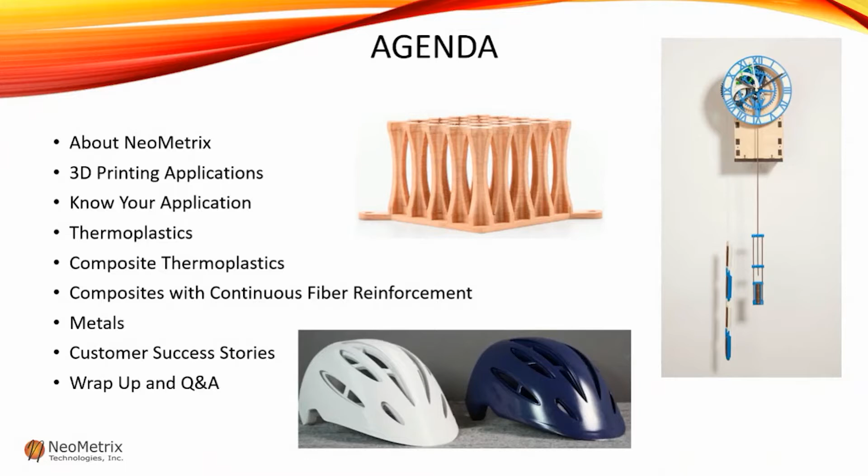So here's our agenda. I'd like to start by telling you a little bit about NeoMetrix. Then we'll review a variety of 3D printing applications, and we'll discuss things you should consider for your specific printing applications. Then we'll look at some various materials available, including thermoplastics, composite thermoplastics, composites with continuous reinforcement fibers, and also metals. Then I'll share some interesting success stories with you, and finally we'll wrap up with a brief summary of 3D printing solutions. It should take about 30 minutes. I hope that's good with everyone.

NeoMetrix has been delivering 3D engineering solutions since 2003. We provide scanning services for reverse engineering projects and also quality control inspections. We also have quite a few 3D printers in-house, so we're available to print parts for customers. We also sell equipment for 3D scanning and 3D printing solutions, as well as any related software packages. We provide complete training on all hardware and software solutions. Today's webinar will focus on 3D printing materials for BigRep, Intamsys, and Markforged.

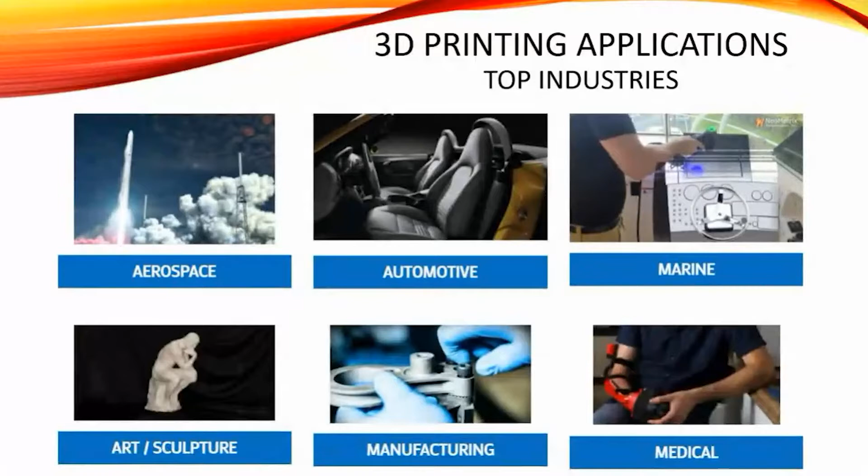And now back to our previously scheduled topic. 3D printing is used in many industries with a wide range of applications, all requiring different material properties. In the early days of 3D printing, the primary application was basic, simple prototypes. But today we have the ability to use more advanced materials, so the applications have also grown considerably.

Some examples are end-use parts. We have the strength and durability allowed for functional, complex parts at reduced costs. Tooling development - we can quickly print complex geometries that cannot or are not easily machined. Service or maintenance - we can create custom tooling or fixtures that will ultimately reduce downtime, which saves us money. And we have the ability to make functional prototypes for testing.

So now you have the ability to evaluate actual part properties. You can make design changes, quickly print new iterations. What this does is it takes the guesswork out of engineering. You don't have to rely on just the simple, basic prototypes anymore. What are some of your applications for your current 3D printing projects? Feel free to drop us a note in the chat or let us know what industry you're from.

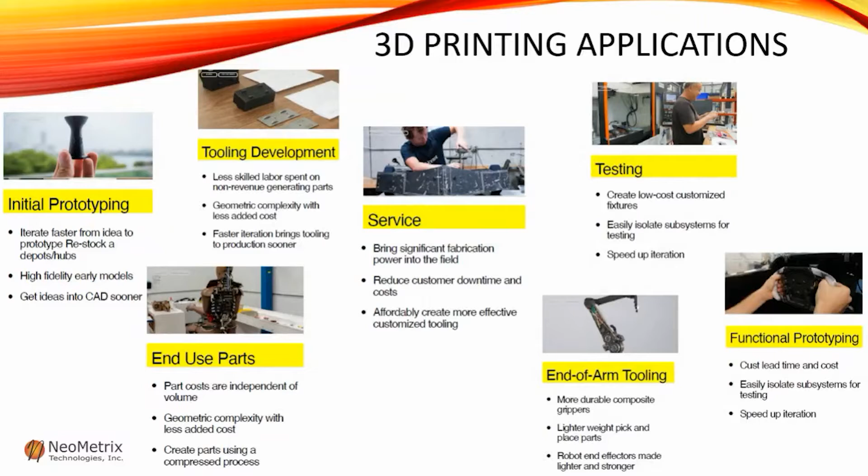There are many things to consider when trying to select a material for 3D printing. What is the primary function of the part? Is it a prototype? Will it be put to any tests? Is it going to be an end-use part that needs to be strong but also visually appealing? What are the specific requirements for the part? Does it need to withstand heat or flames? Is it a load-bearing part? Will it need to have any flex?

Perhaps you need to prioritize these requirements. Which ones are the must-haves? How high of a priority is cost? And I realize this opinion might vary, even between people working on the same project. But it's always worth considering.

How many parts do you intend on printing? Is this an annual number? Is there a cheaper alternative material that will still give you the expected quality? And finally, what about the color or finish of the part? Is this critical? If you find a material that meets all other criteria except for the color, perhaps it can be painted or dyed in a post-processing step.

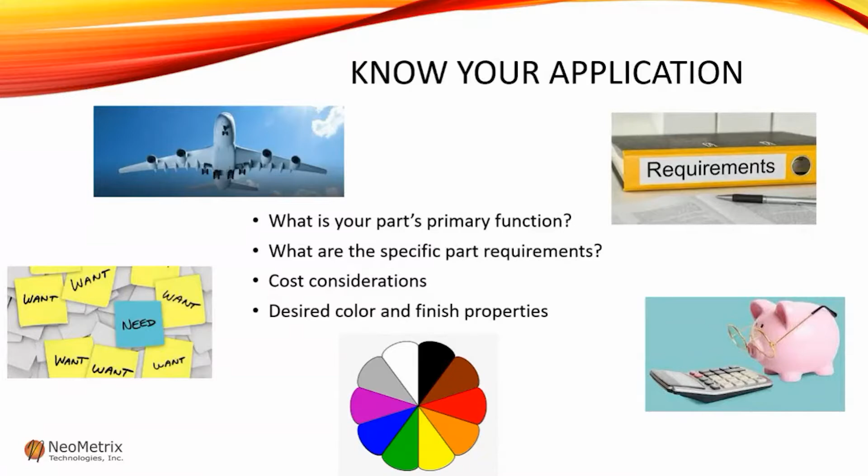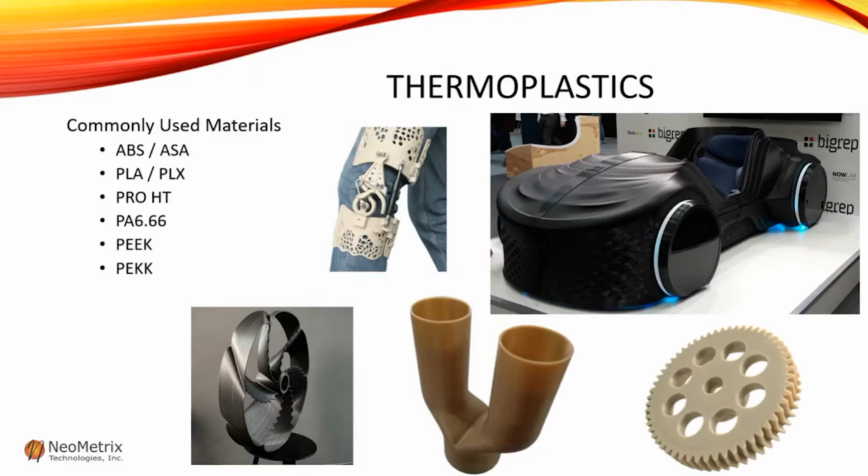ABS is one of the most commonly used and most versatile materials available in 3D printing today. It's really a great choice because it has structural integrity and detail. It's ideal for wear and tear parts.

ASA is actually similar to ABS with a couple of advantages. It's actually stronger and stiffer than ABS. It also has excellent weather resistance, UV, water, thermal resistance. ASA can actually withstand the really hot temperatures of sitting in parked cars in the southern heat. It's a very popular choice for vendors attending trade shows that have sample parts they want to display, but they might be subjected to a lot of time in a hot car.

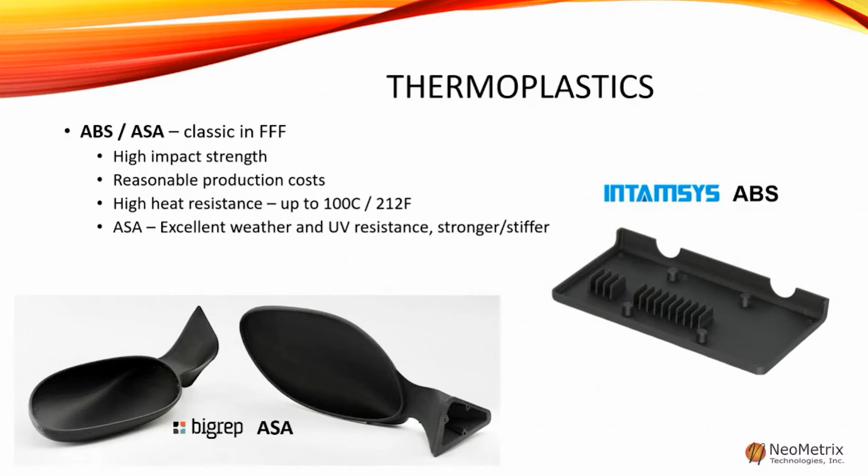PLA is also a very popular choice, and it's actually really easy to use. It's stronger and stiffer than ABS. It has great geometric stability. It keeps its shape when it cools. It's fully biodegradable, and that's great for the environment.

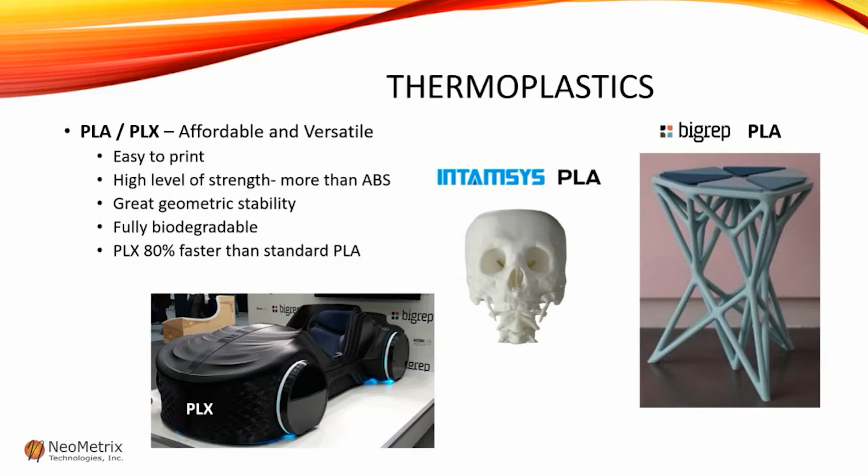PRO HT, this is actually very easy to print, and it's what we typically use here at NeoMetrix for our large printed parts. It's a PLA alternative. It has a higher temperature resistance, so it has minimal warping and shrinkage compared to a standard PLA. It also has similar characteristics to ABS, temperature resistance, tensile strength, and flex.

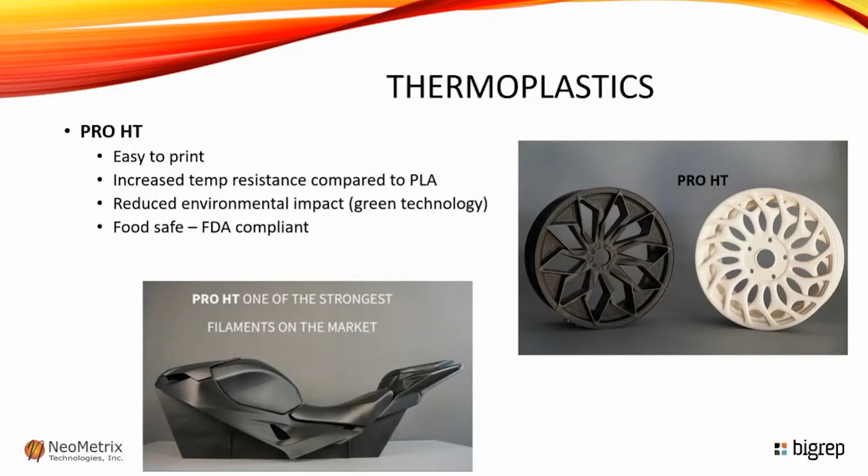It's fully biodegradable under the correct conditions, so it's definitely a green technology. And another advantage is it's completely food safe. It's approved by the FDA. The photo shows an example of a large printed part without any warping effects. You can also see it has a nice matte surface finish.

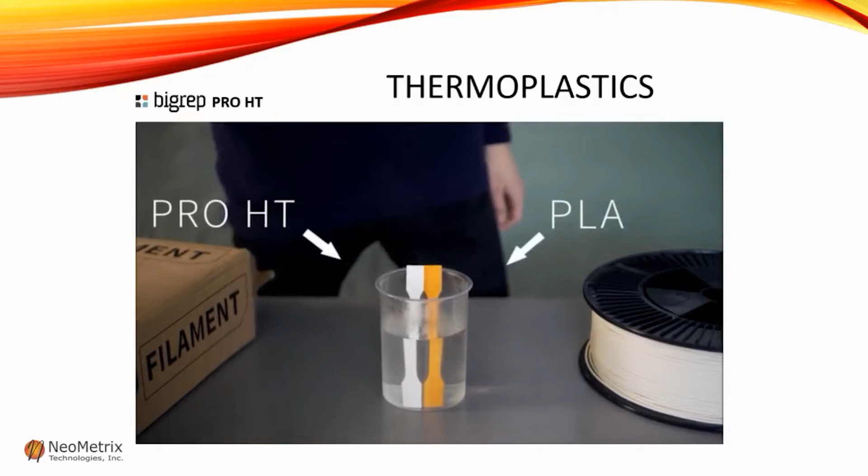Next, I'm going to share a video that demonstrates the heat resistance of Pro HT compared to a standard PLA. So they just poured boiling water, and you see Pro HT is on the left, and then the yellow strip is PLA. And so they're going to sit there, and you can actually see the PLA is already deforming. So the white one, the Pro HT held up really great in the boiling water.

Nylon has become a go-to in traditional manufacturing. So it's really not surprising it's also a popular choice for 3D printing. It's lightweight, flexible, durable. It's great for wear and tear parts like functional interlocking gears. But you do need to be careful when using this filament. You want to keep it very dry because it likes to absorb moisture. But this actually helps with post-processing steps like dyeing or painting.

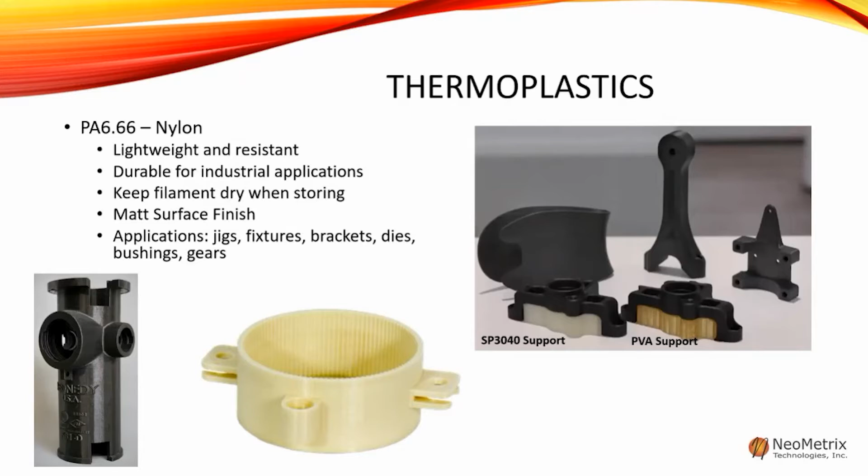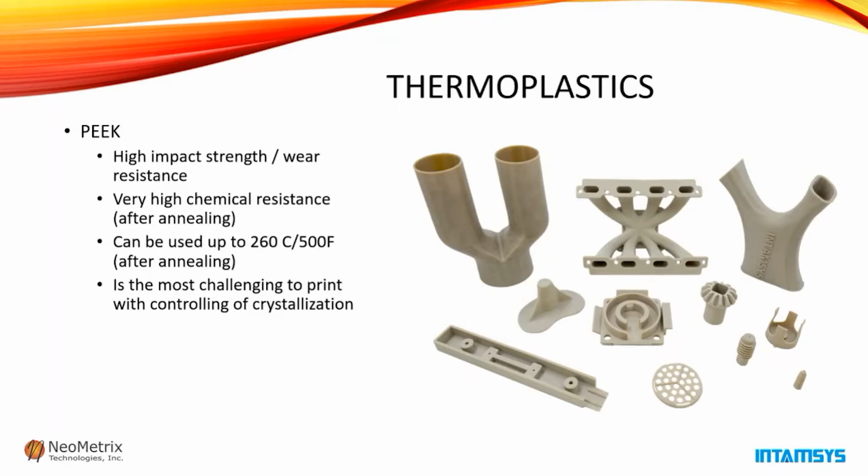Next, we're going to move on to PEEK, which is a great example of a high-performance thermoplastic. It has a very high strength and wear resistance. After annealing or heat treatment, it can be used in applications up to 500 degrees Fahrenheit. This makes it ideal for many industries requiring flame-resistant material, such as aerospace. It is a challenging material to print, though, because it requires very high heat for its crystalline structure. It's also considerably more expensive than the previous thermoplastics we've discussed.

PEKK has similar properties to PEEK, but it's much easier to print because it has a slower crystallization. It can also be used in applications up to 500F after annealing. So it's a great choice because it is easier to print, but it does cost more than PEEK.

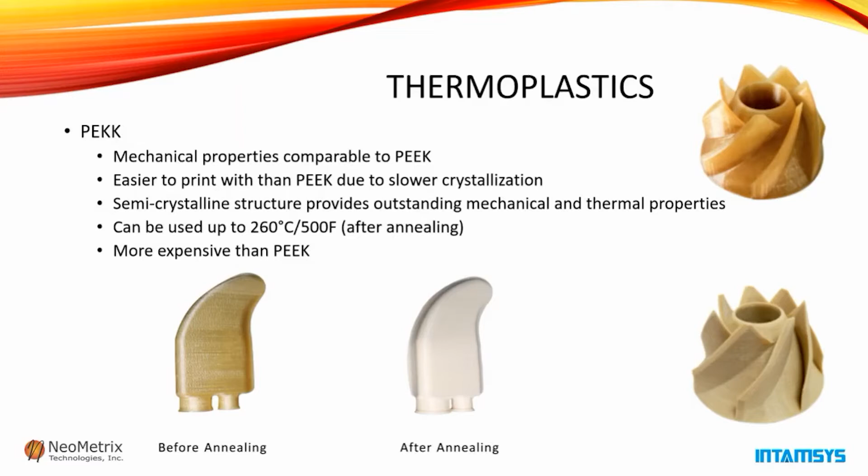And now we're on to the next section of materials, composites. So we hear a lot about composites these days and how great they are, but what exactly are they? Well, the simplified definition is a composite is made up of two or more materials. So typically you'll have a matrix and a reinforcement. Composites offer a lot of benefits, such as strength, lightweight, corrosion resistance, design flexibility, and durability.

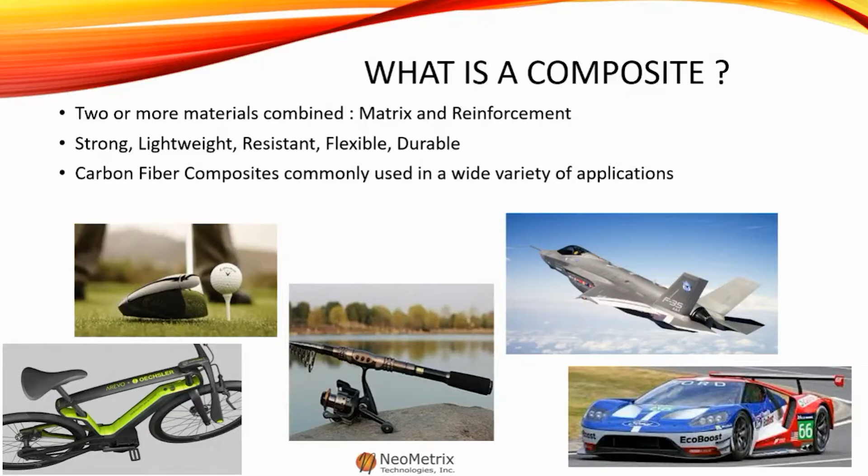Carbon fiber is a very popular choice because it's strong and it's extremely lightweight. So you've seen this in many everyday products like golf clubs, fishing rods, and bicycles. Carbon fiber helps to optimize the performance of race cars and even airplanes.

Onyx is a great example of a composite material. To best describe this material, it's helpful to use an analogy of another common composite we see every day. Concrete is made up of cement, sand, and aggregate. Each individual component won't even hold its own shape with any amount of force, but when you combine them, they make a rigid, solid material.

Onyx is created by combining a nylon thermoplastic with chopped carbon fibers. We already know carbon fiber has very strong attributes. Another benefit of this blend is it also has a really impressive high-quality surface finish.

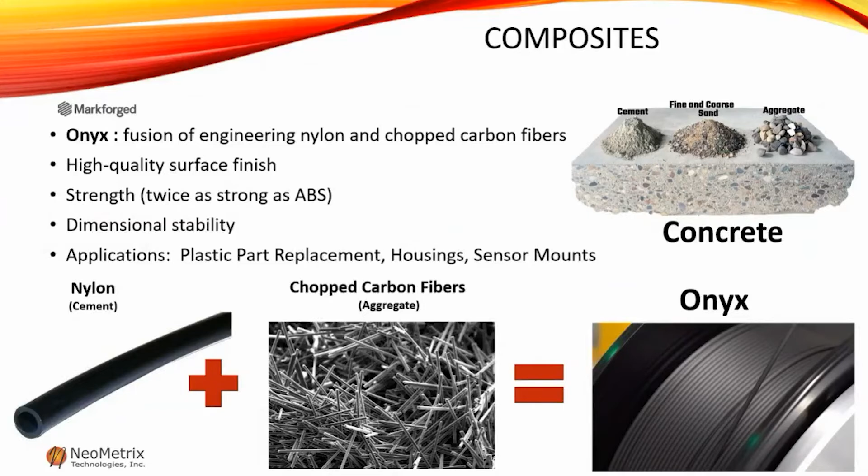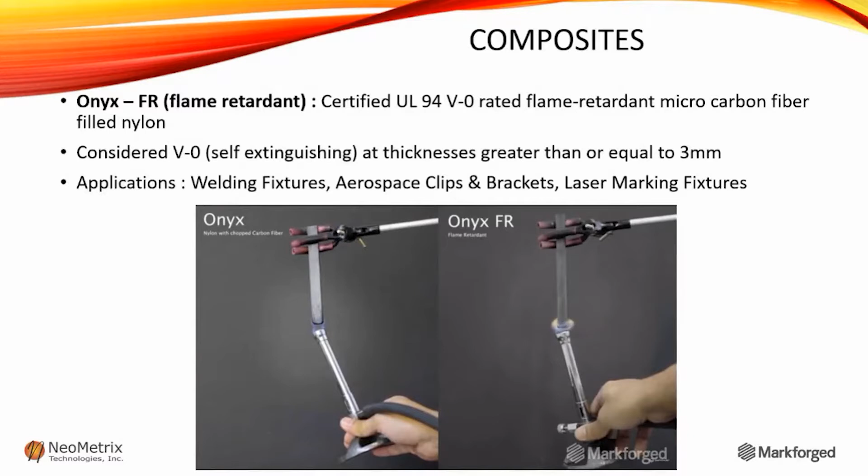A couple of variants of Onyx are also available. This one is Onyx FR, or flame retardant. You have all the benefits of Onyx: strength, a great surface finish, and it can now survive in a flammable environment. So it's a great choice for industries like automotive, aerospace, and defense. This video does a great job of showing how great this material is. Even under a flame, the fire is not spreading. It's actually just self-extinguishing.

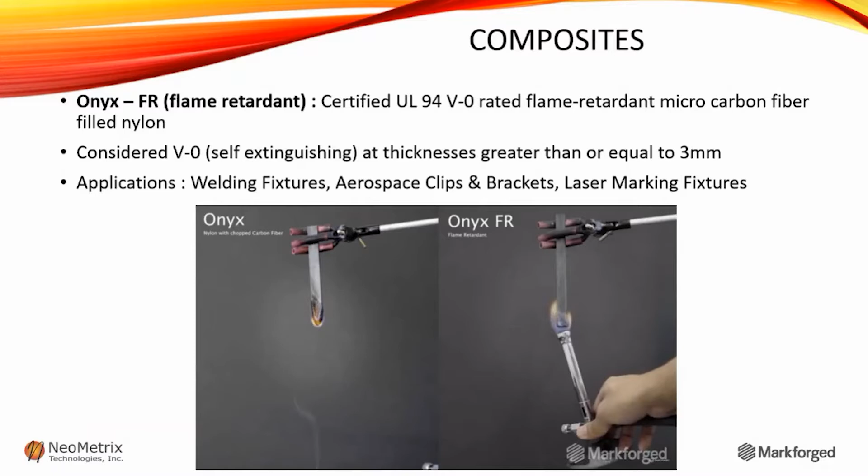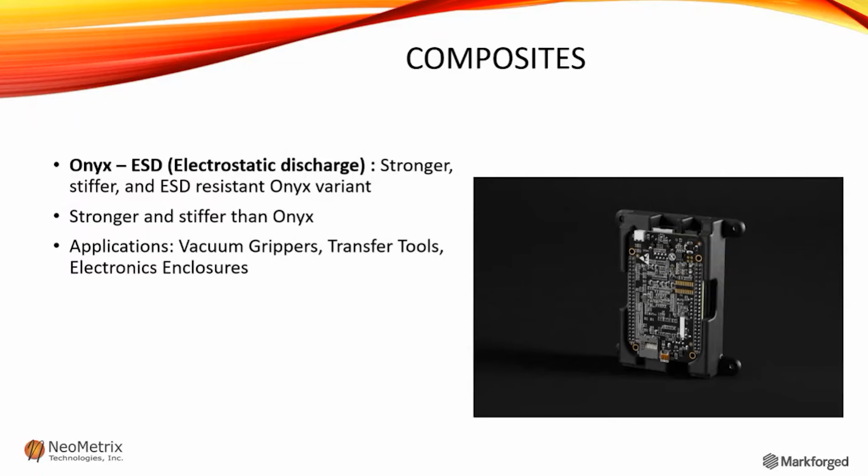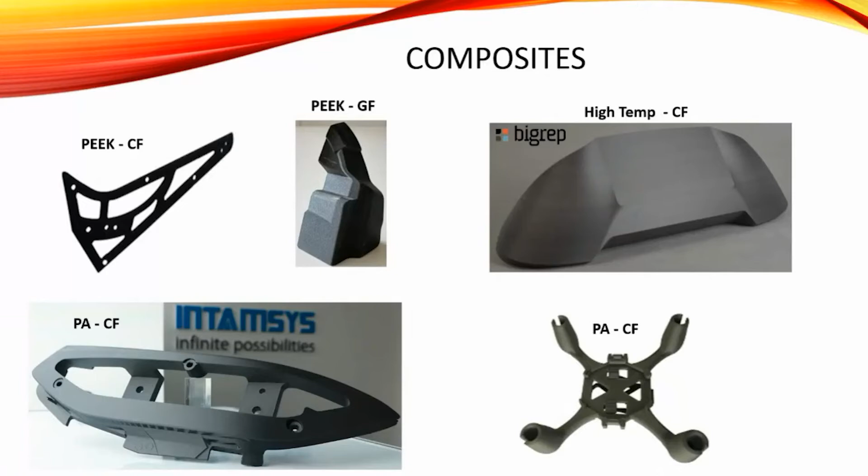Here are some other composite examples: materials mixed with various chopped fibers. You'll see PEEK with carbon fiber, here's an example of PEEK with glass fiber, a high temperature material with carbon fiber, and then at the bottom there's a couple examples of nylon with carbon fiber. If you haven't already, you may want to try printing with a composite material.

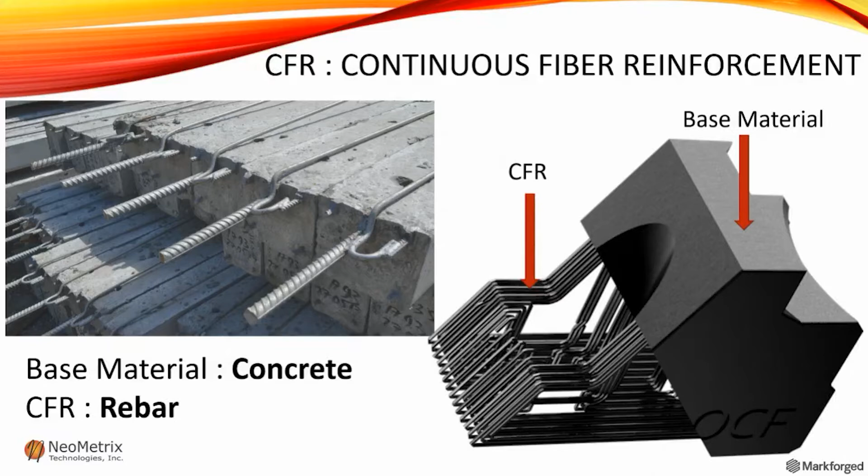If strength and stiffness are high priorities, you may want to utilize continuous fiber reinforcement to optimize your parts. Looking again at the concrete example, how do we make concrete even stronger? Adding rebar increases the strength and stiffness. Similarly, we can add layers of continuous reinforcement fibers into the matrix or base of our printed part. So now we're going to review some of our filament choices available for CFR.

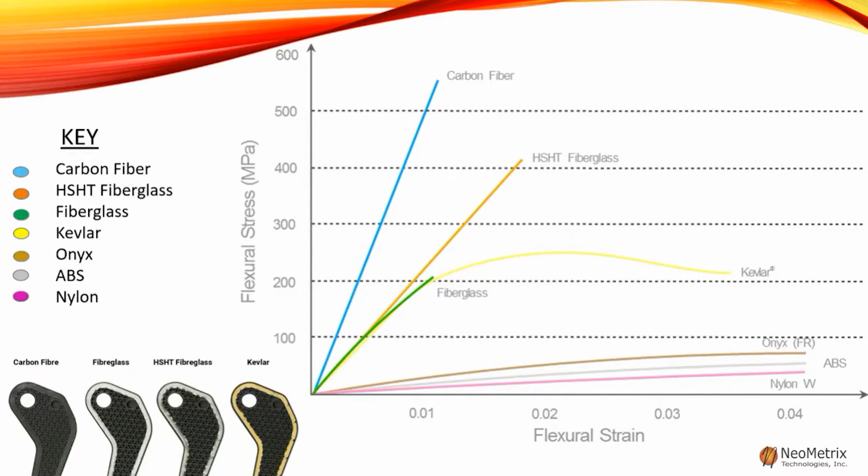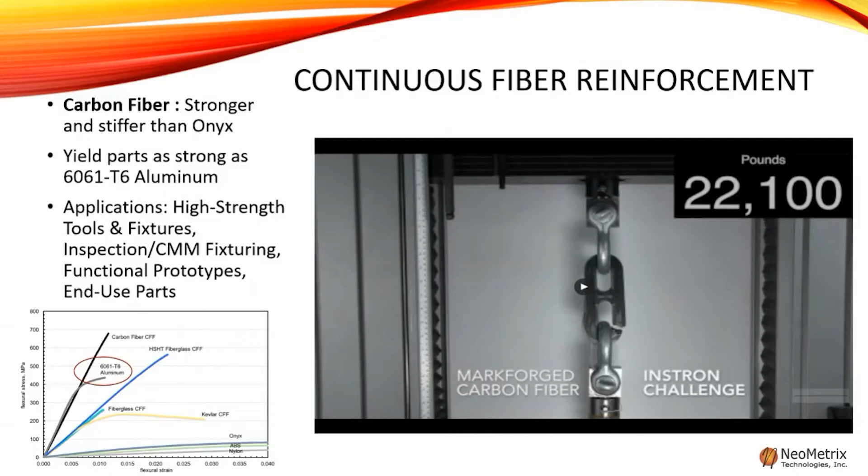The first filament we'll look at is carbon fiber. The best combination for strength and stiffness is pairing Onyx with continuous carbon fiber reinforcement. This combination creates parts that are stronger than aluminum. So you have a great benefit: you can now make end-use parts and functional prototypes, and easily print them in a fraction of the time it would take to machine those same parts.

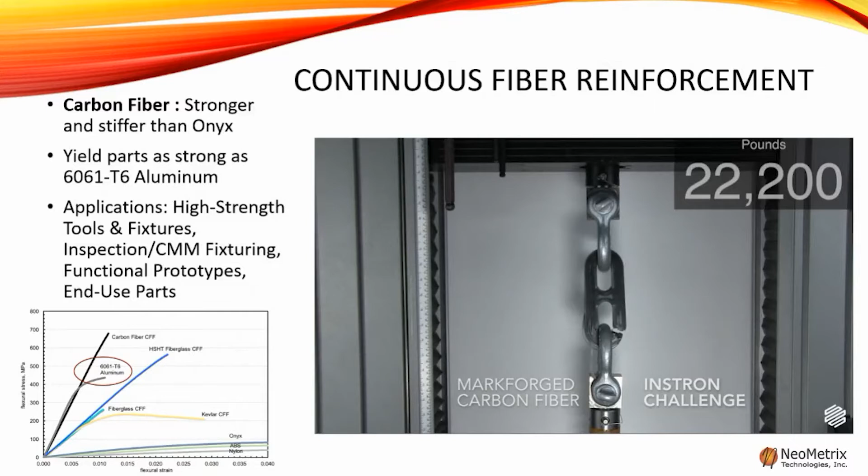So now we're going to look at an Instron challenge. This is a part with Onyx and carbon reinforcement. They're applying a lot of force to see if they can pull it apart. It's showing over 21,000 pounds right now, and it's still holding together. I just love it. So how far is it going to go? 22... oh, it just broke. So just over 22,000 pounds. That's pretty impressive.

Kevlar is a great option if you need a forgiving and durable material. Kevlar is commonly used in bulletproof vests because the goal is to absorb a force and not break at high impact. Using nylon as a base and Kevlar as reinforcement results in flexible yet very strong parts.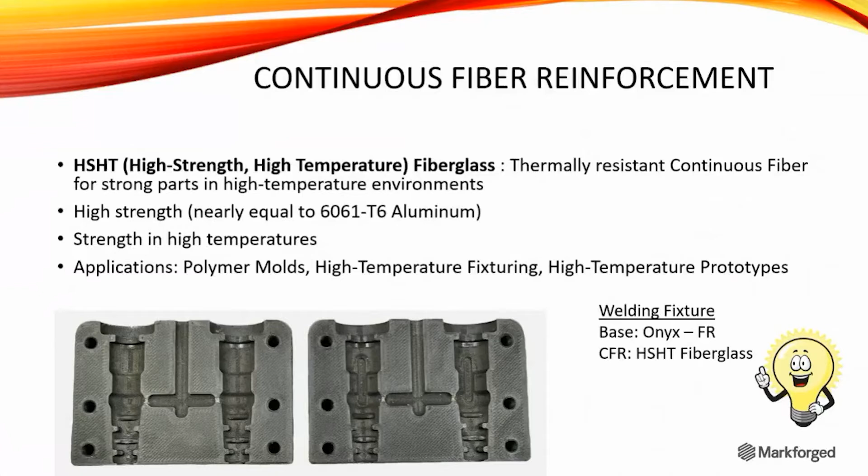All right, and now metals.

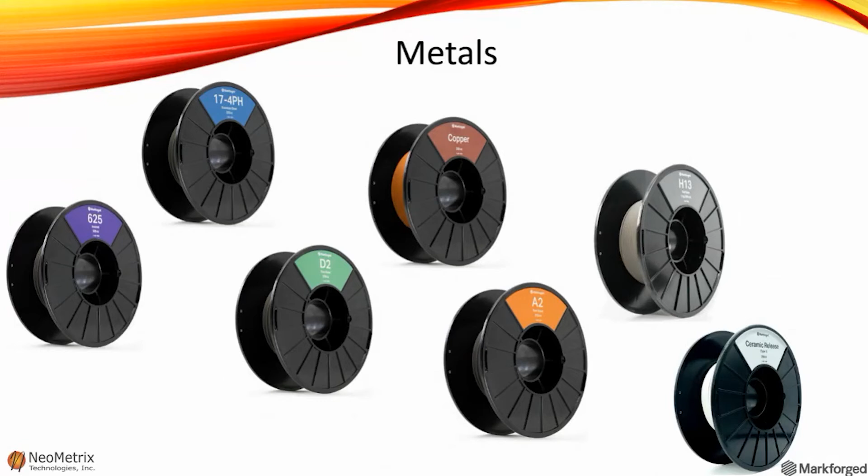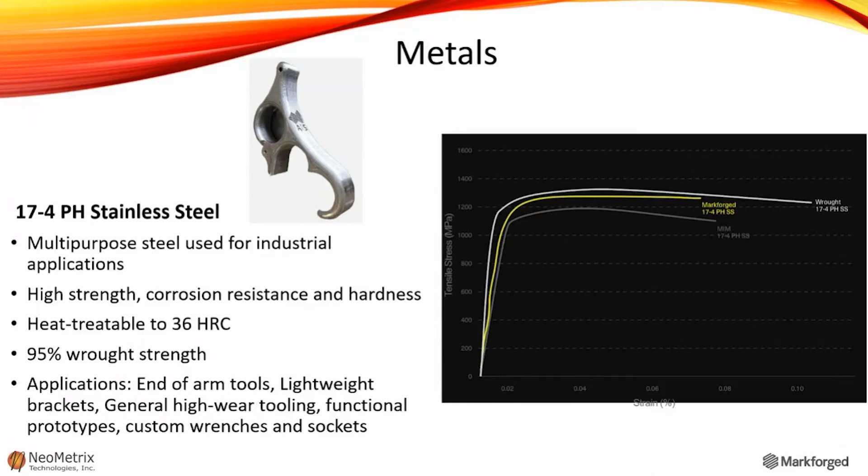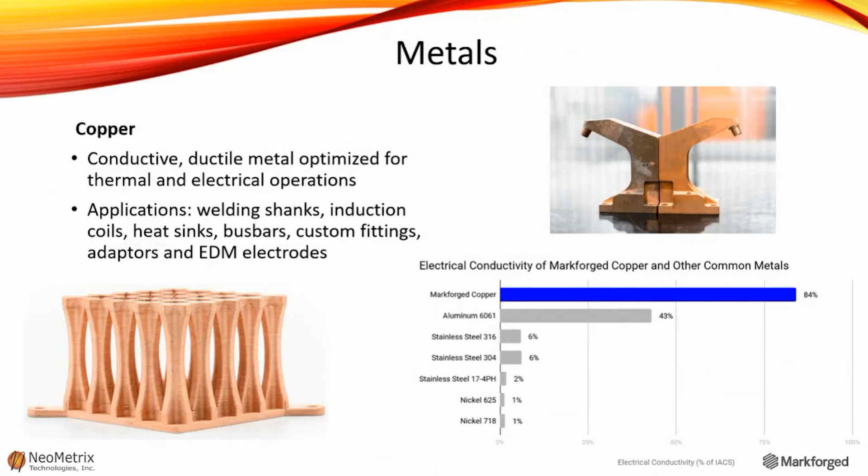All right, Inconel 625. It's a unique superalloy that's extremely corrosion resistant and strong at very high temperatures, so it's great for functional prototypes or end-use parts that are designed for harsh environments.

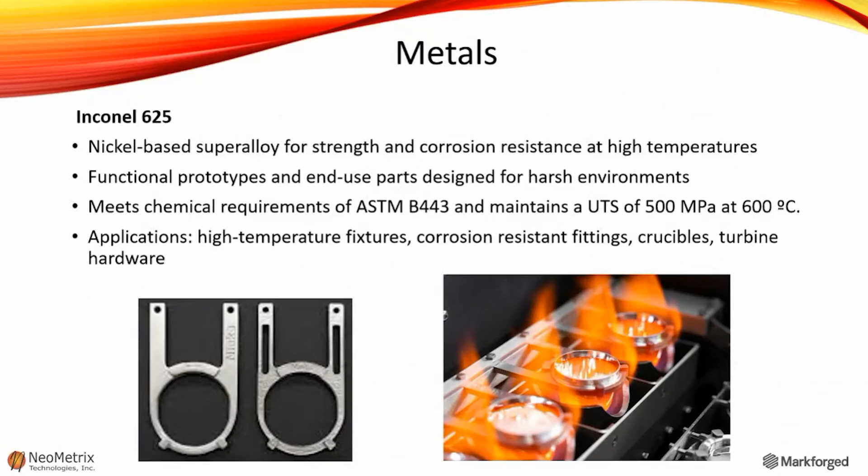All right, so now we'd like to share some success stories. This is the first one we have up.

JC Steel is actually a 100-year-old foundry and pattern shop located in North Carolina. They create patterns for sand casting using traditional materials like hardwood and aluminum. The molds are then used to create large durable parts like iron to use in extrusion equipment. They are now 3D printing the mold patterns using Pro-HT because it has great strength for sand casting applications and it's also environmentally friendly. They were able to reduce their expenses by 75% while also increasing their annual production by 50%.

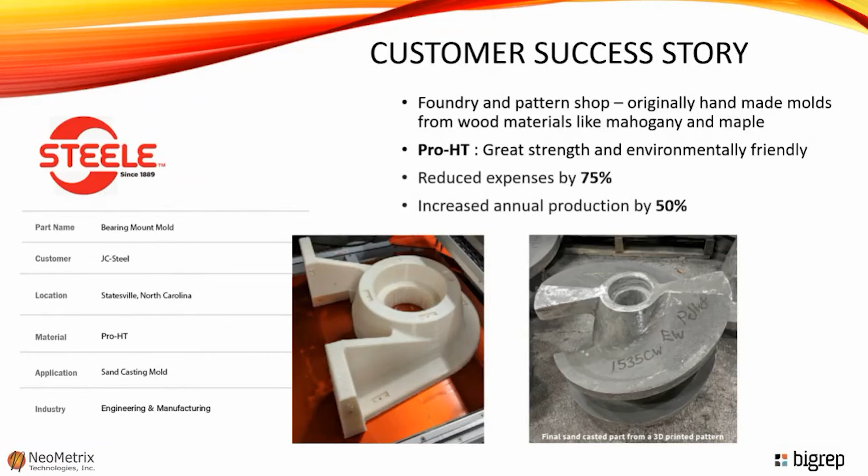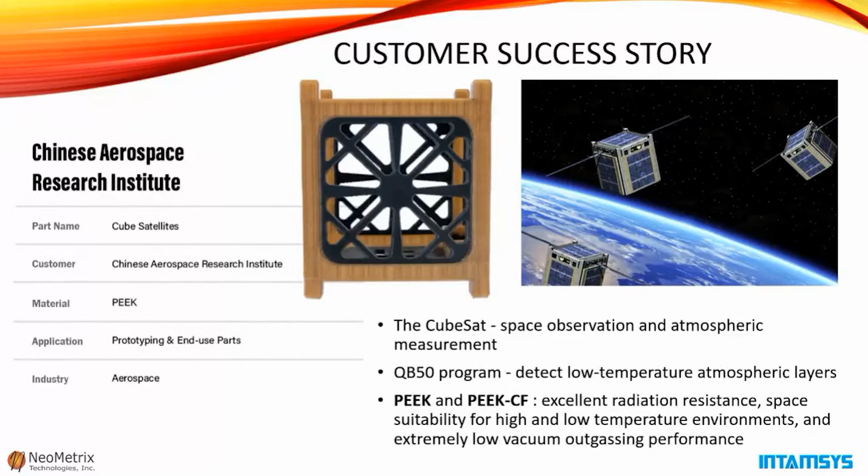Now, the CubeSat is a standard cube module used for simple space observation and atmospheric measurement. The QB50 program uses a 50 cube satellite network to complete a scientific mission to detect low temperature atmospheric layers. The ideal material in this case was PEEK and PEEK carbon fiber. They were a great choice for space because they have excellent radiation resistance, work well in high and low temperatures, and have extremely low vacuum outgassing performance.

All right, then we have a company in Italy. They use a lifting tool to move heavy engine parts like pistons around their factory and cargo ships. Their previous lifting tool was machined out of steel, but they found this was too expensive, too time intensive, and really just too heavy for people to transport. So they decided to redesign the part.

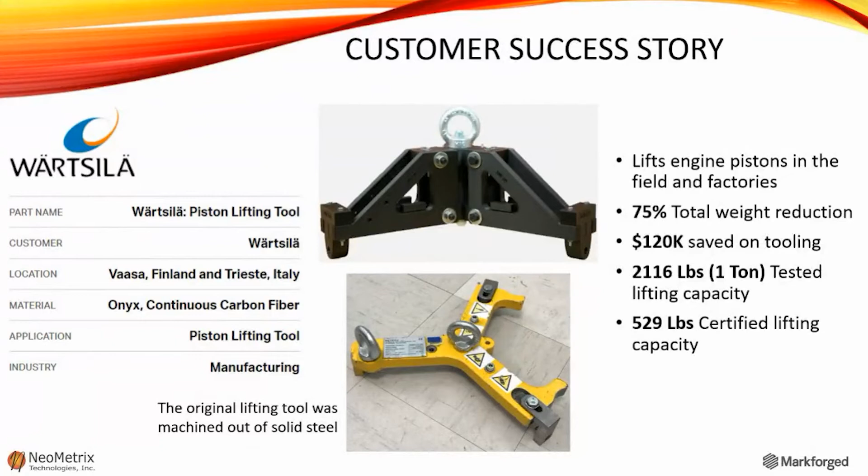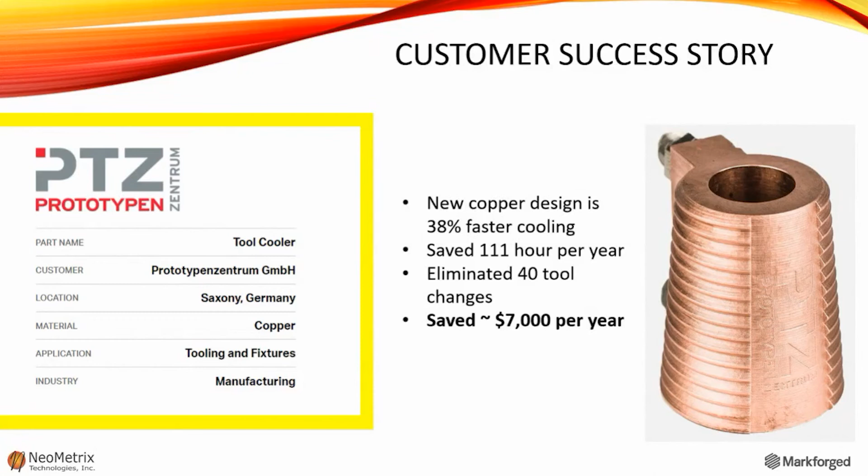There are a lot of things to consider when choosing materials for 3D printing. I've shared some information on some options that are available. I encourage you to reach out to us to discuss any of your specific applications, and we'll be happy to recommend the ideal printing solution. To wrap up, I wanted to review some of the solutions we have available currently.